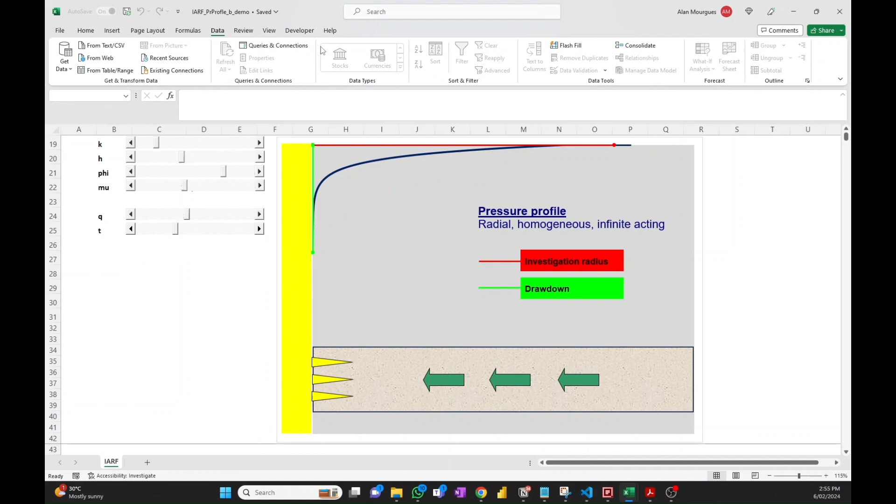Okay, so where is it that this chart is getting the data from? Just for you to be able to actually edit this at will using your own ranges or your own set of parameters, you need to go to the data menu, sorry, to the view menu, and then unfreeze.

Now you can access the entire sheet. So what I have here at the top is the diffusivity equation resolved in radial coordinates. This is the infinite acting radial flow formula, and this is taken from the DDA book by Kappa, which is actually free, available on this website.

So I'm going to move my browser window across, and this is what you would see, the DDA book. You can actually download the PDF, or you can also read it online. When it opens, you have this menu at the left.

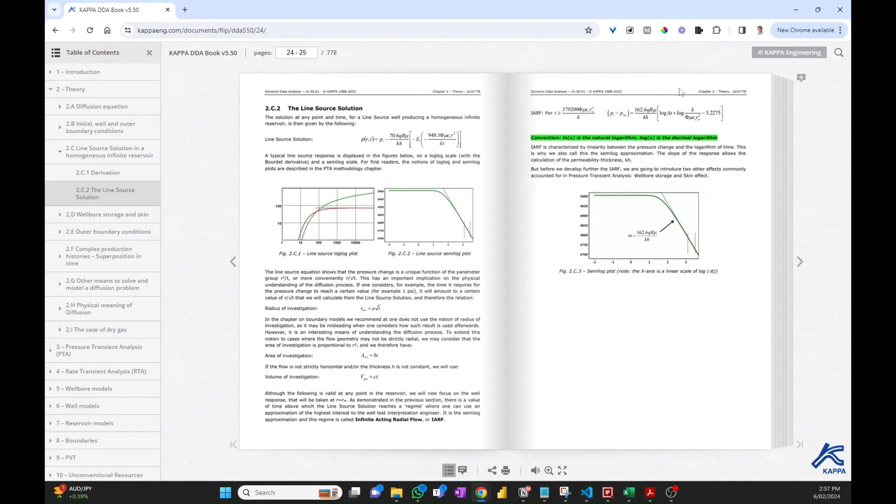You can go to the theory to find the line source solution in a homogeneous infinite reservoir, and go through the whole derivation process. This is the line source solution in radial coordinates, and you notice that's exactly the formula I'm pasting into this Excel sheet. Initially it was without skin, and then skin is added in the derivation.

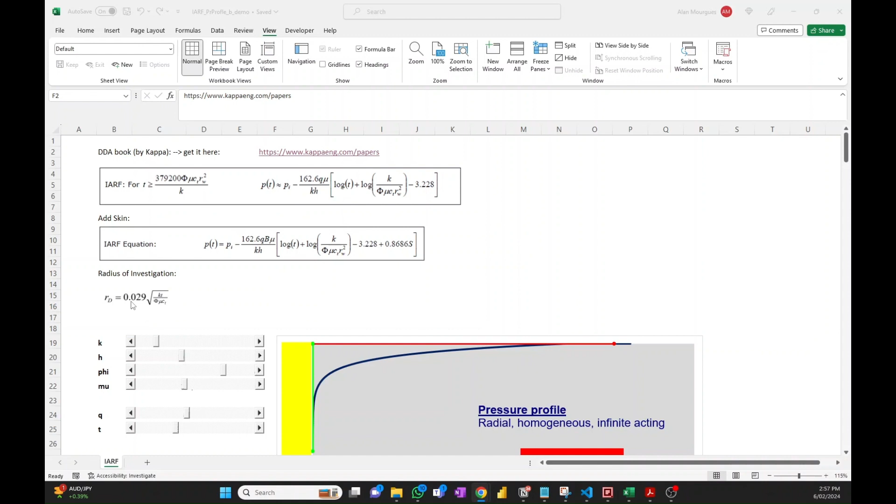I'm also bringing snapshots of the investigation radius formula because I'm going to use those two to build the series that I'm bringing to this chart. Having these formulas up here, all I need to do now is implement them.

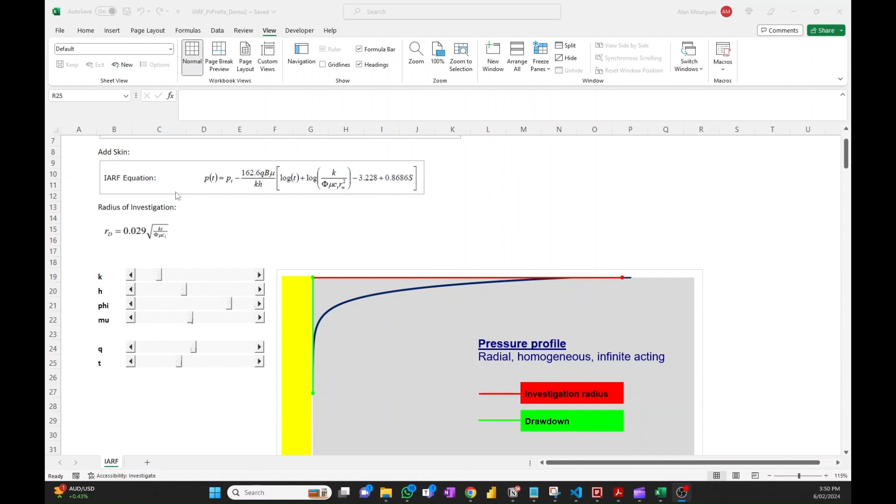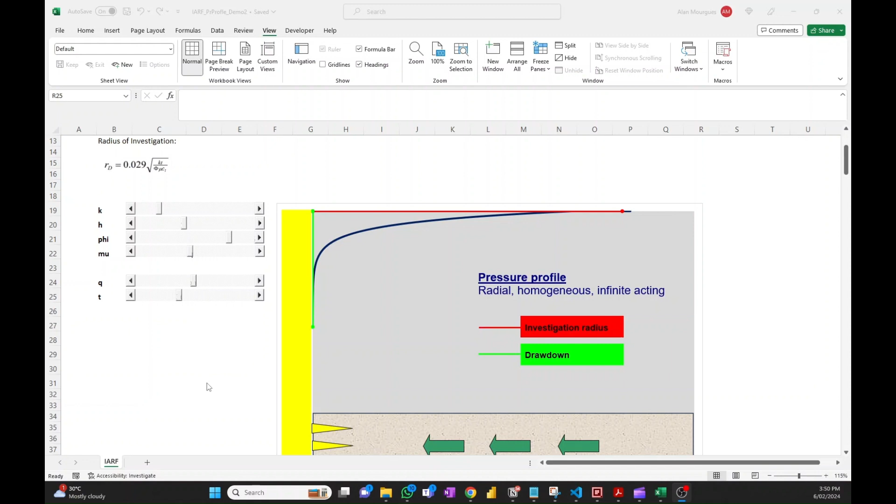So what I've done here is hidden everything. Every calculation to create these charts is sitting on this sheet, but in white fonts. Let me just make room, and I'm going to move this chart to the right.

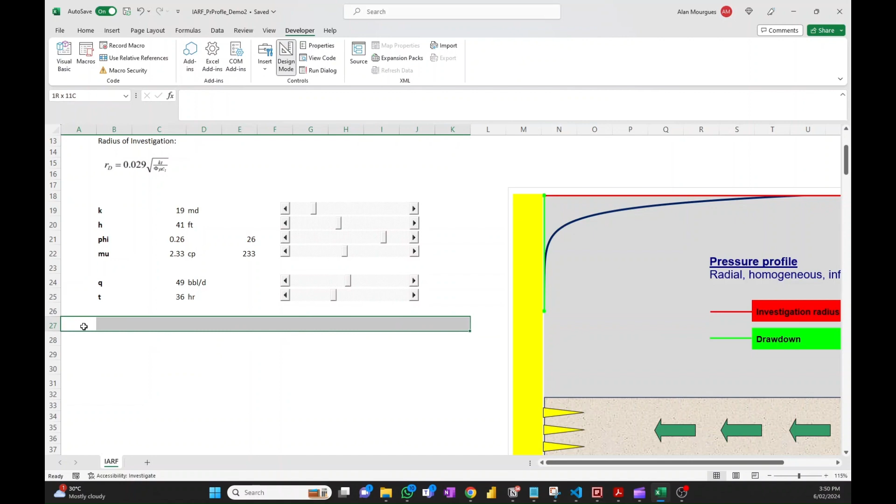I'm going to go to the developer tab, design mode, to activate these scroll bars, and move them to the right to uncover what I have sitting underneath. Below here, I'm just going to select this and put a black font so you can see what I got here.

So this is where the magic happens, right? On the first column I have the distance radius, which is the x-axis on my chart. And on the vertical axis I have the pressure, which is calculated for each distance at any point in time.

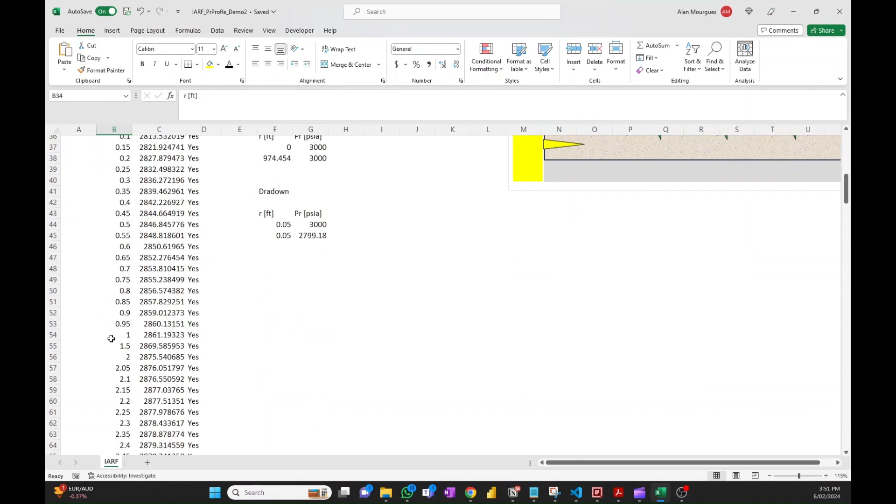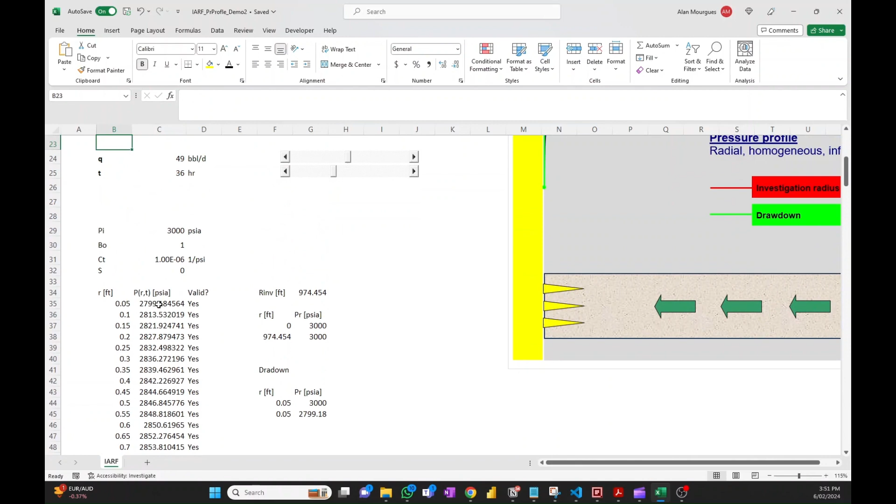Now these are numbers. Distance, I just ran from an initial value to a final value, and these are just numbers. From an initial number to a final value, as I was saying. And then the pressure is the formula which comes from that equation.

I don't know if you are aware of this, but many people do not know this trick: you can name cells in Excel, which makes for a much easier auditing process. For example, this cell, permeability, I have a K label in column B, row 19, but the value is held in this cell, which typically would be referenced in formulas as C19. In this case, I'm naming this cell K. You can name any cell by typing something in this box here.

So for example, if I put any number there, let's say 46, and then hover over this box, which is referencing E15 by default, I can just click on it and rename that cell with whatever name I want. Now I can reference that cell by its name, so H plus 1, see? It's much easier to audit formulas when you have cell names instead of the default Excel references. I've named all these cells, and you can audit the formulas yourself.

So you can go item by item, term by term, making sure that this is exactly the formula I have implemented in this cell. I have added an if statement to make sure there is no crossover. That if statement means when this value calculated by this formula is higher than the initial pressure, cap it at that initial pressure value, just to ensure continuity and no crossover above initial pressure.

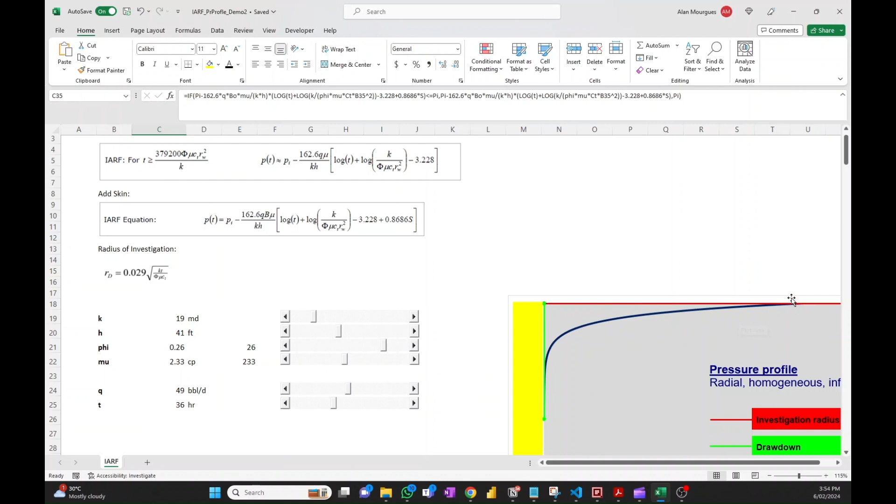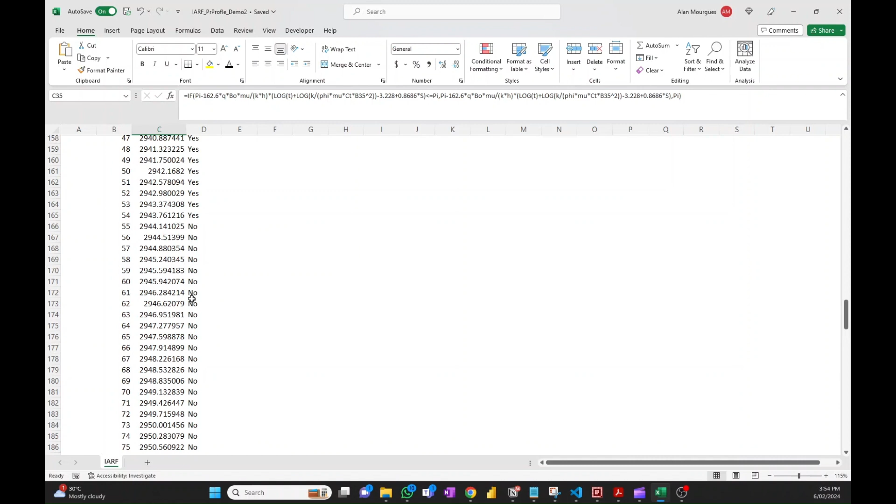The other thing I have here is a valid flag column, which tells you whether the calculation is valid or not. If you go to the farther distances, you would see these no's here. The reason is that the solution of the diffusivity equation is a complex exponential integral function, which can be approximated by this simpler expression with log terms when the time value is higher than this term.

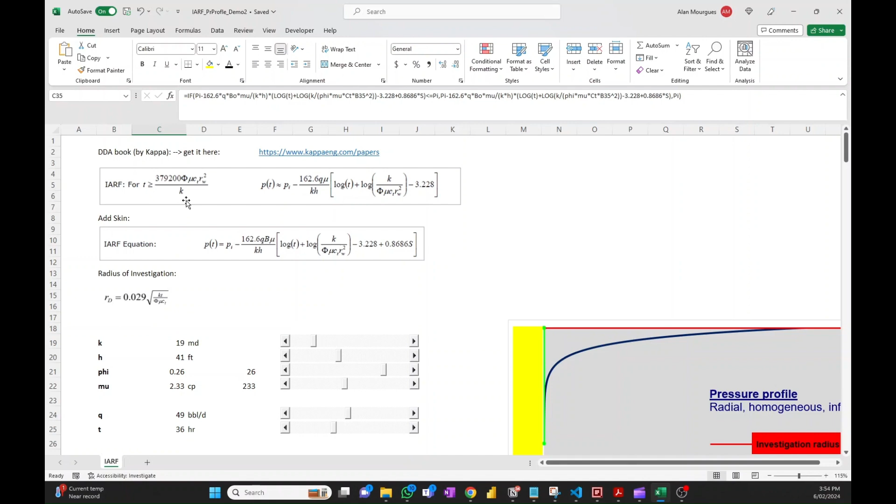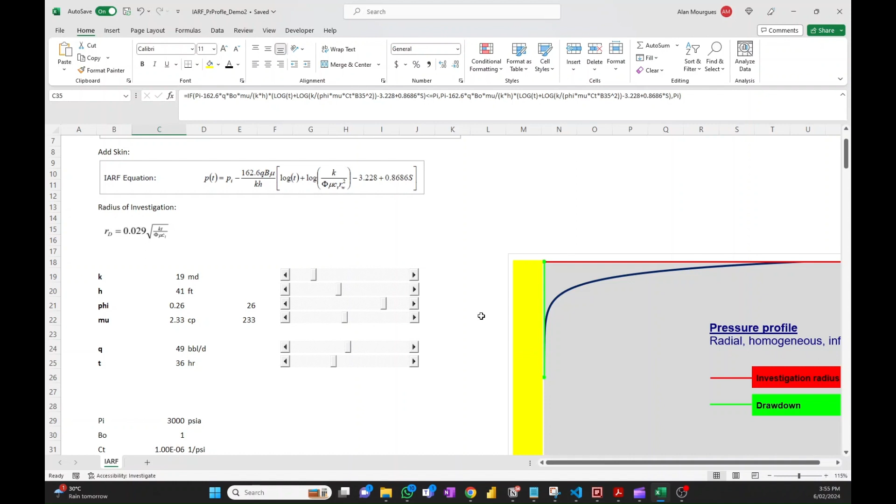I've added this flag, but it's just for visibility. I'm still opting to use this formula for the entire pressure profile, just to ensure continuity and not make my life complicated. I'm not using this for precise calculations of pressure values or to construct a precise pressure profile. All I want is to quickly assess, interactively with these sliders, the impact of each parameter. So I'm not too fussed about being precise.

Once I got this, I have everything I need, distance and pressure, to build that pressure profile. On the right hand side, I have these two blocks which I built for two additional series: the green series, which is the drawdown, and the red series, which is the radius of investigation.

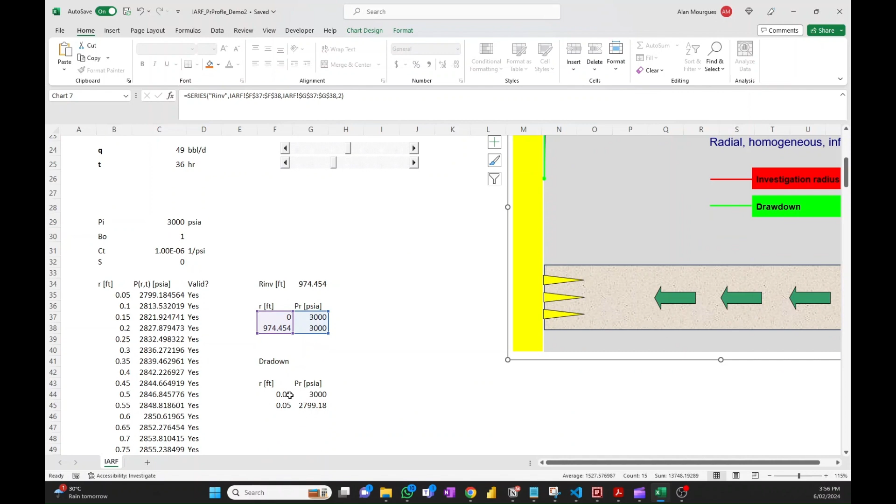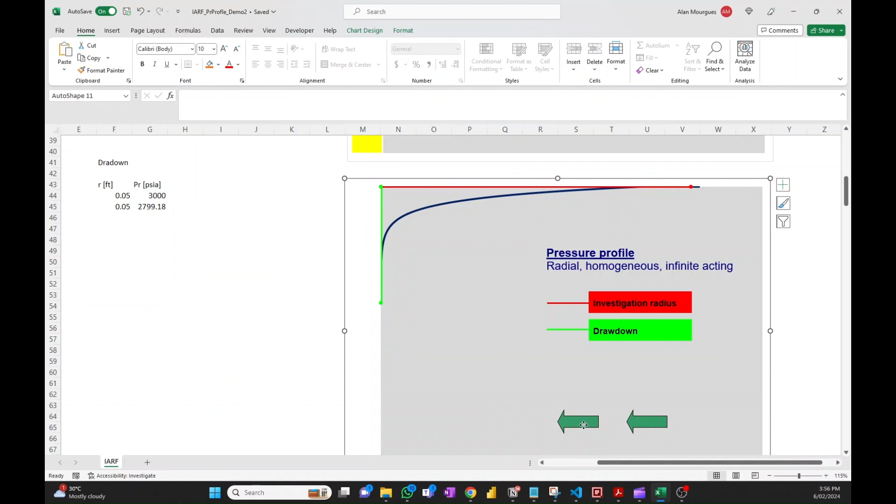I've built this - obviously these are simplistic two-point straight lines, a vertical straight line and a horizontal straight line, and those three are the series in this chart. Now I'm going to create a copy of this chart just to demonstrate that it's nothing more than a simple line chart in Excel with some drawings on top. These are just drawings I can eliminate, and then I can bring back the axis.

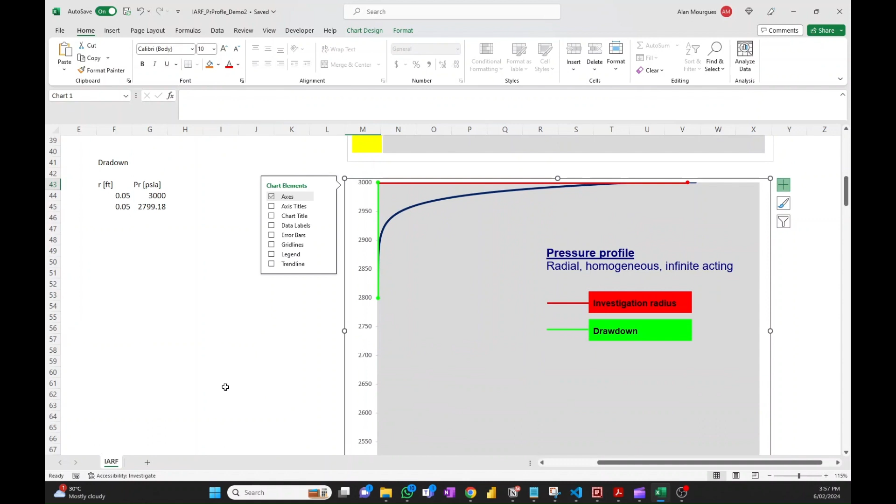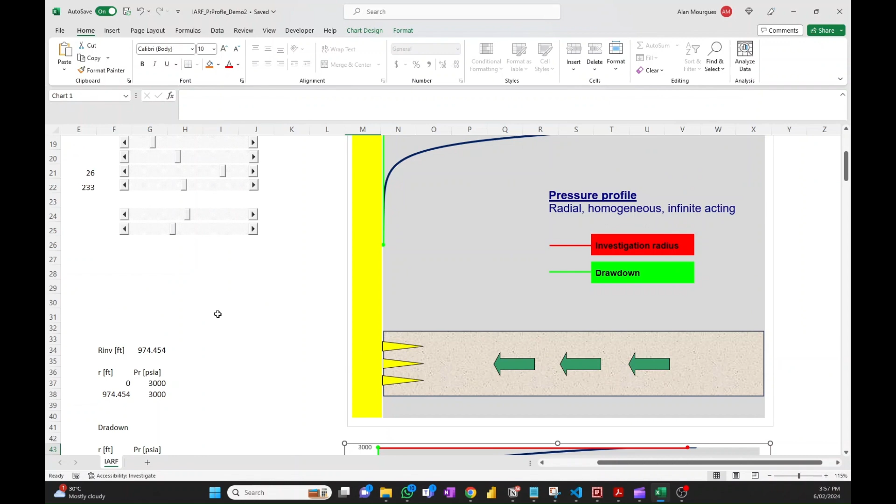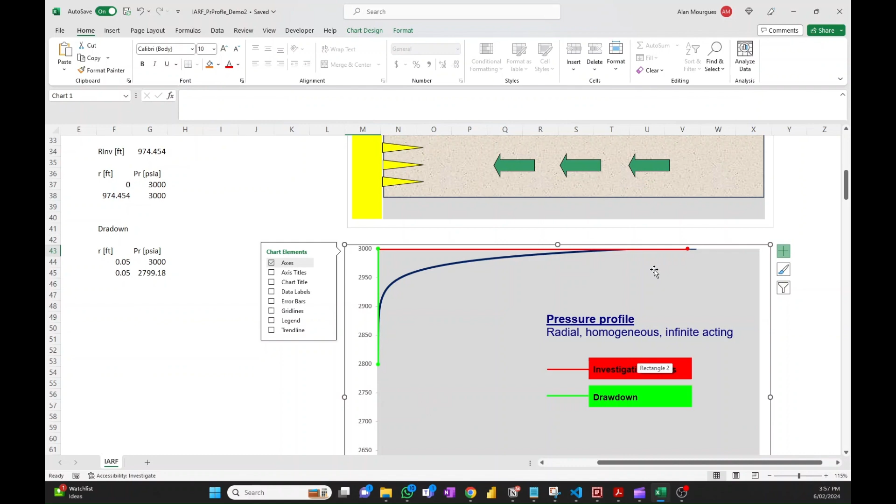So you can see this is a simple, regular, good old Excel line chart. These are the vertical axis values that I've selected to create this profile and play around with these tools, but you can customize these to values more suitable for the projects you work with. It doesn't really matter - I'm not concerned with the numbers at this point. All I want is to see visually the pressure profile and the impact each parameter has with this interactive tool.

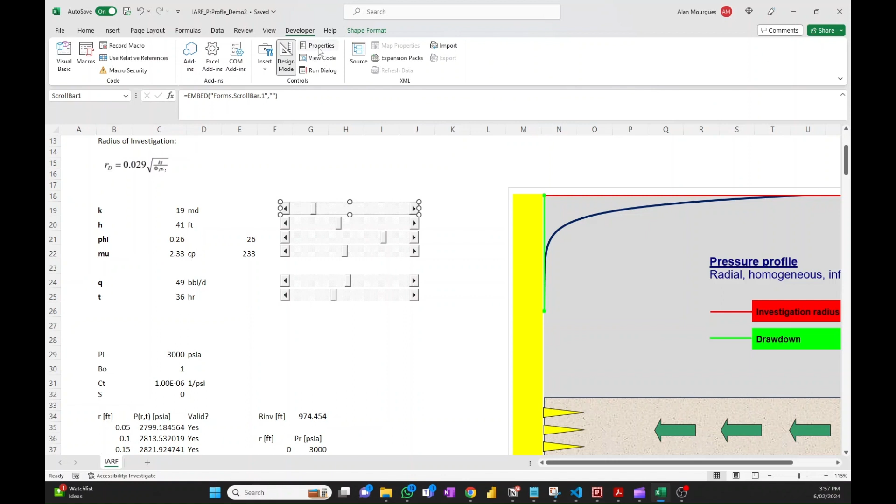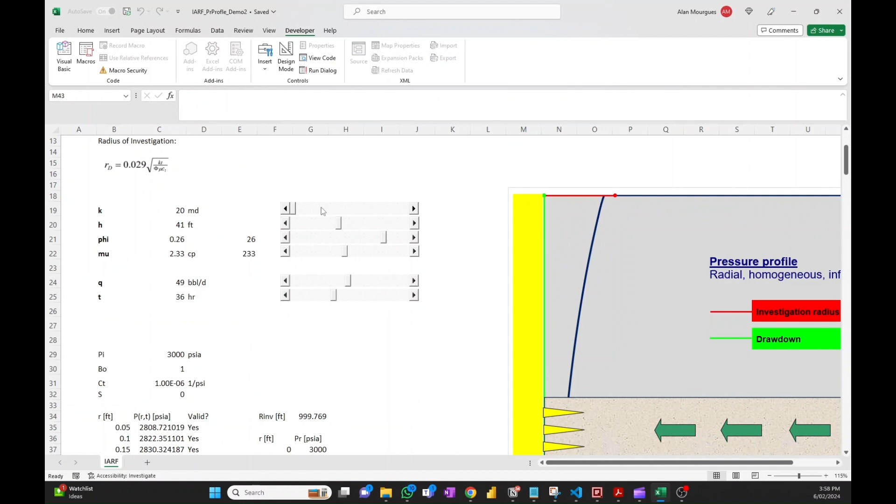That's how that slider or scroll bar is going to operate. So you can do the same with each scroll bar - just go to design mode, select it, and change the properties if you want to link to a new cell or change the range of that scroll bar.